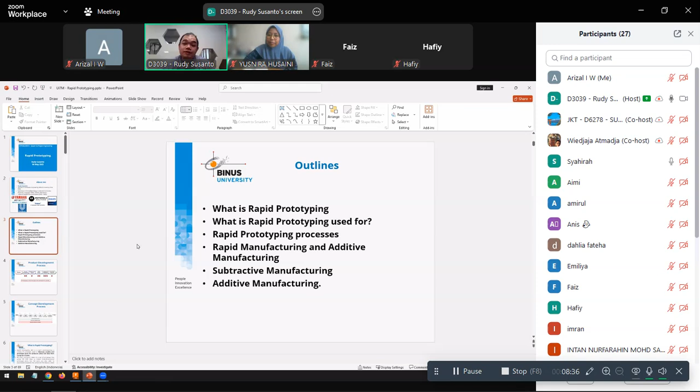In the product development process, you have planning, concept, system level design, detail design, testing, refinement, and production ramp-up. This is usually very common in the development cycle of a product.

Especially in planning, when you plan, you start to draw a concept of what you want to do, either in the electronics or the case or design that will be presented by the user. One note is sometimes you can also make more time for the product or the case. Usually in computer engineering or embedded systems, most of the time you are focused on the development of the electronics.

What I mean is if you have 100 hours, usually in university you are taught that this 100 hours is 60% design, 40% testing, or even sometimes 60% testing, 40% design of the electronic design. Now, the problem is when you are in industry, usually that 60 hours will be reduced to about 40 to 30 hours only. So the development of the embedded system, especially the electronics, you will be hard pressed to do in only about 30 hours, or 30% of the time.

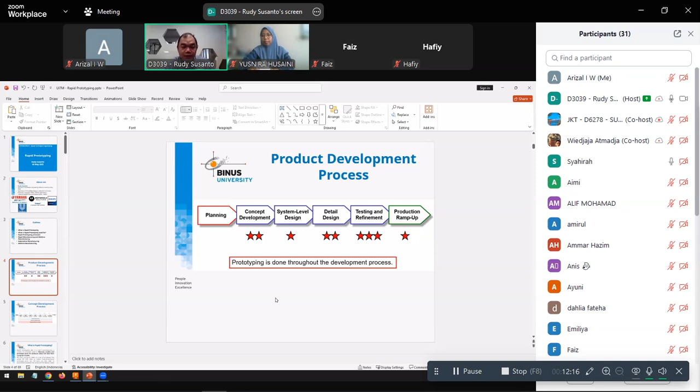In every part of the development process, like planning, concept, system level, detail design, testing and refinement, even in production ramp-up, you can include prototyping or rapid prototyping, either for small refinement or even major revision of the device.

So where does this prototyping come in? It's when you already try to build and test the model. That's when you want to start the prototyping of the product, especially the design, the material you want to use, what kind of strength, how long you want this product to last, how efficient the manufacturing is, etc. So the prototyping process is quite important, even at early stages of the product.

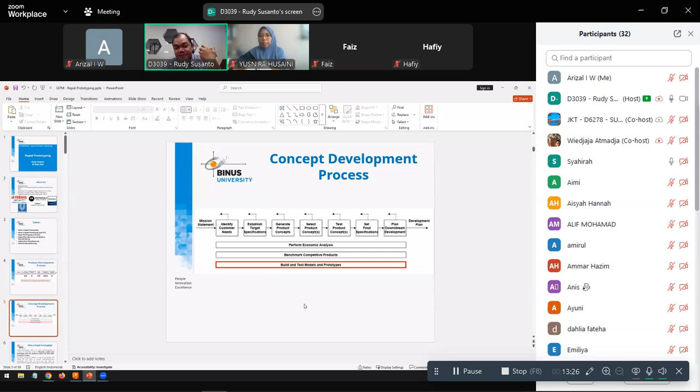Now the problem is, when I told you rapid prototyping, what is actually rapid prototyping? Rapid prototyping, or RP, is a term that encompasses a variety of processes used to fabricate models.

Prototyping a part for a product using CAD data from computer models, so you can already build your design if you want, even at the early stages of your design, your product. For example, it doesn't have to be complicated — just basic measurements: length, height, thickness.

You can start to do some prototyping, especially connecting it to the user. What type of user wants to use it? Is it normal people or disabled people?

For example, when we try to build a braille system, you have to consider if the product is quite heavy or light enough for the user to carry around, or is it too expensive? Do you need a battery that lasts longer, or how many hours will the user use it? That's the kind of thinking you want to incorporate at the earliest stage of the design.

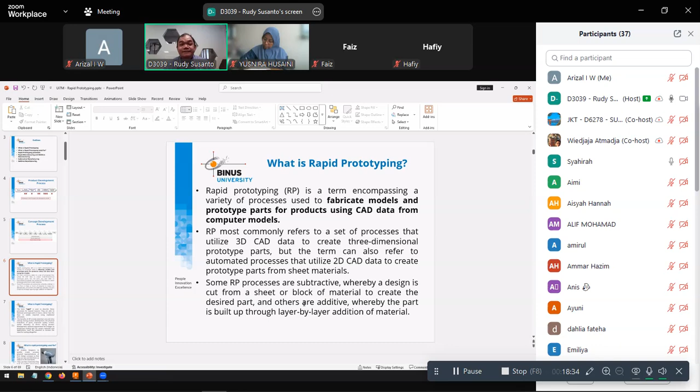That's enough. Now, the term 'rapid' describes a process for several reasons. The term rapid is usually confined to from days to hours. Maybe all of you already heard about 3D printing, CNC machine, and like that.

These are the tools that we will use in terms of rapid prototyping, so you don't have to worry about that. Usually if we talk about this about 10 years ago, you would find it quite difficult or challenging when you want to make a rapid prototype.

Usually we'd go to Singapore, not Singapore—when I want to use it, I go to my partner in Philippines, Thailand, or even China. But in this day and age, you can easily find 3D printing in the university or in a makerspace.

Now, this redefines the term rapid. Ten years ago when we called something rapid, it was one week. Now it's merely hours or even days. I want to start to print right now at 9 to 10, then in the afternoon after lunch, my model is already fixed. That's how the production system has evolved now.

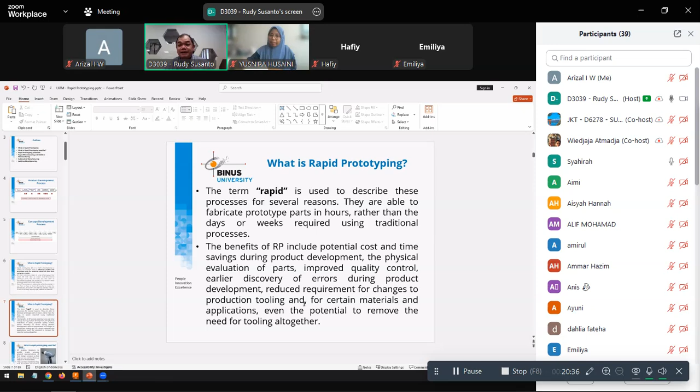But that also gives room for you to fix your mistake quickly. That's what I like from rapid prototyping. For example, this is one of the designs that we try to build.

A simple hand drill. This is all 3D printed. The casing is all 3D printed, the design. The motor and the controller we try to build it—you will in college learn about how to build that using microcontrollers. How about the battery? But everything in here is 3D printed.

The materials may be different, the colors may be different, but we built this, and the production for this is about 16 to 20 hours, that fast. So you can build it, you design it, and the day after tomorrow you can show it to your lecturer. This is our design—that's how fast rapid prototyping has become.

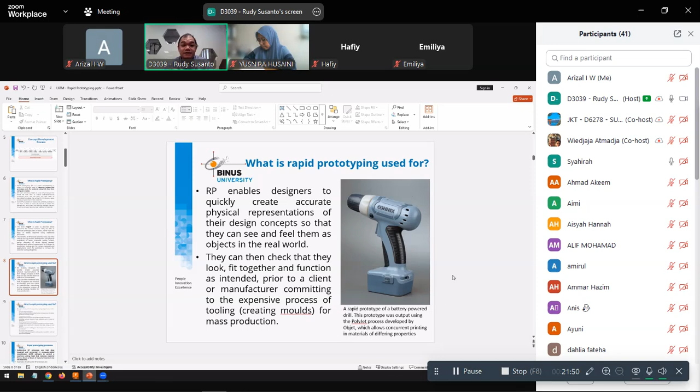Now, what is rapid prototyping used for usually? The first one is in-house design evaluation, physical testing, clarification. For presentation to marketing or market reaction, it's mainly because you want to try to sell your product as soon as possible.

But in our field, in computer engineering or electrical engineering, the main use is in-house design, physical testing, especially about the safety. As an engineer, one of the most important things you have to evaluate in your system—for myself—is 50% that the device is working. I'm sure all of you can attest to that. You're already taught how to test, how to build, but the main problem, the next 50%, is how safe your device is.

That is the main concern for me when you are trying to build a device that is, especially if you want to make it a mass product that many people will use.

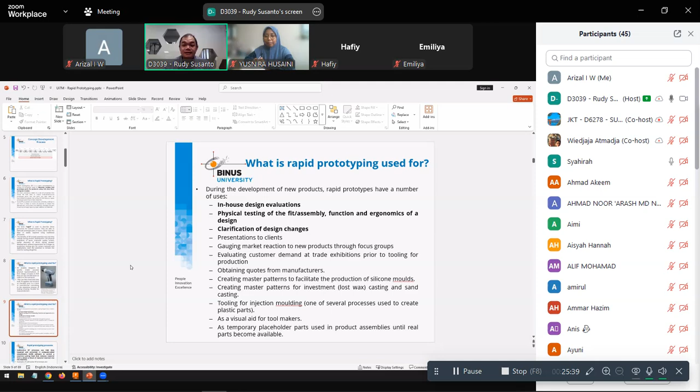Now, the rapid prototyping process can be built by, for me, two main processes. The first one is subtractive, the second one is additive. The subtractive usually uses CAD or CAM to control a sheet or block of material. You reduce the material into the shape or pattern that you want. That is subtractive manufacturing.

You can use laser cutting, water jet, plasma, milling, routing, hot wire, EDM or wire electrical discharge. The simplest one to use is hot wire cutting. You can also use milling and routing, especially with this era of CNC, routing and maybe hot wire cutting are starting to get more accessible to students in college.

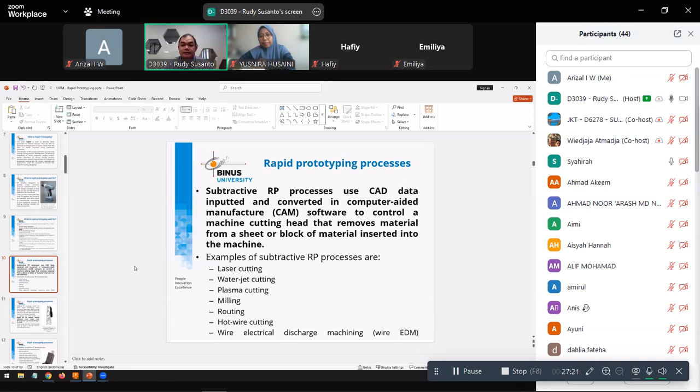But for plasma cutting and water jet cutting you maybe need some certification in operating the machine. For laser cutting, usually you don't need certification, but you need safety and training for using the machine.

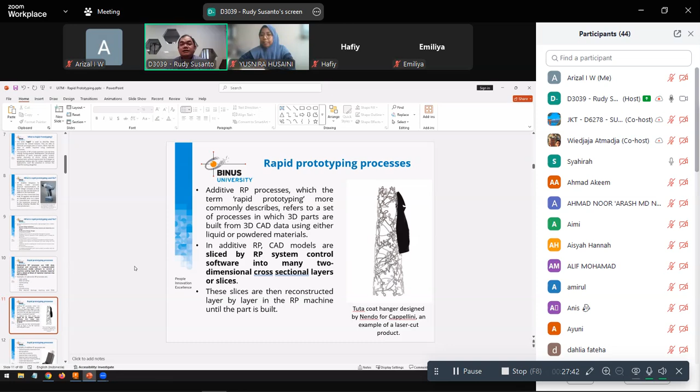Now, for example, this is a hanger designed by Nendo for Cappellini, an example of what's used for rapid prototyping. For example, this one is for laser cut. You can also use, for example, this one - an inhaler design that I was involved in at Kimia Farma. We tried to produce how the inhaler is designed, how the product would be used by the patients who try to use them.

This one is additive - if you look closely there's a line like this. This is one of the products that uses additive manufacturing. You can use, for example, SLA, jet system, DLP, SLS, SMS, DMLS, even 3-dimensional printing or fused deposition modelling, using metal or something like that. But this one we use FDM.

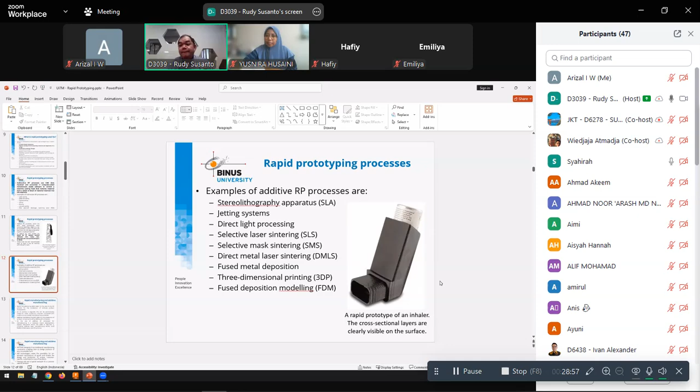The advantage of, for example, additive manufacturing is that sometimes you do not need any specialized tooling. But the machine is a tool, sir - yes, but additional tooling, the machine itself is the thing that you will use. But usually what I'm amazed with in the additive manufacturing world is that you need very minimal tooling to process something from your design.

So you can usually move from a CAD or 3D design to the machine itself rather quickly. Usually if we use, for example, a 3D printer, the only tool you need is just a cutting plier, that's all. Some sanding will be needed, but it's not that difficult to use. So the tooling is quite minimal.

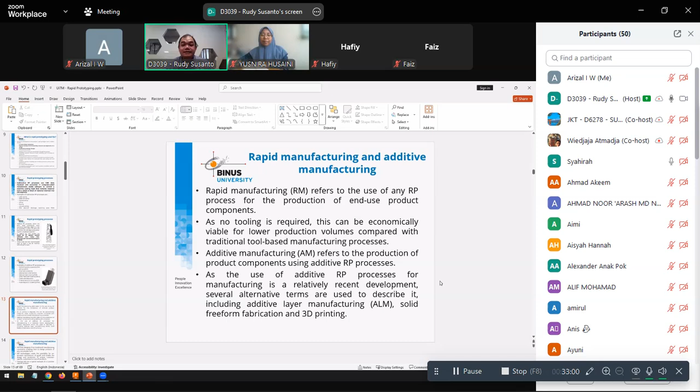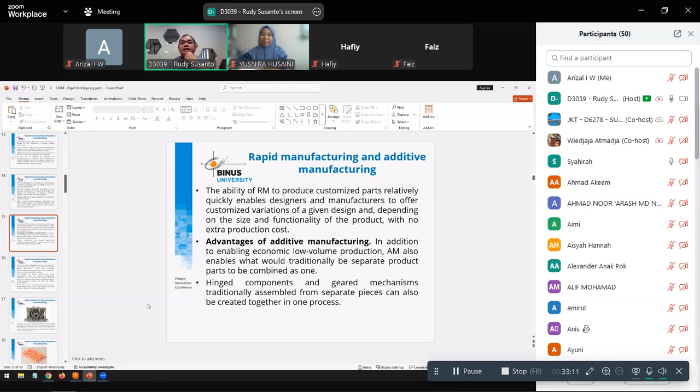Now, the advantages of additive manufacturing is usually you can enable a low economic, low volume production. This is why I highly recommend it for you as a designer, especially if you want to make a design for just 10 pieces, 5 pieces, or even one. Additive manufacturing is one of the best tools you can use.

For example, for your project, every group can have a very distinct project. You don't have to build something with a very large volume. If you're in mass production, you have to go to a factory in Malaysia, Thailand, Vietnam, even China—that's the big boss, we say. But if you just want to build one or two, either for your final project, group project, or personal use, additive manufacturing is one of the best things you can use to design your project.

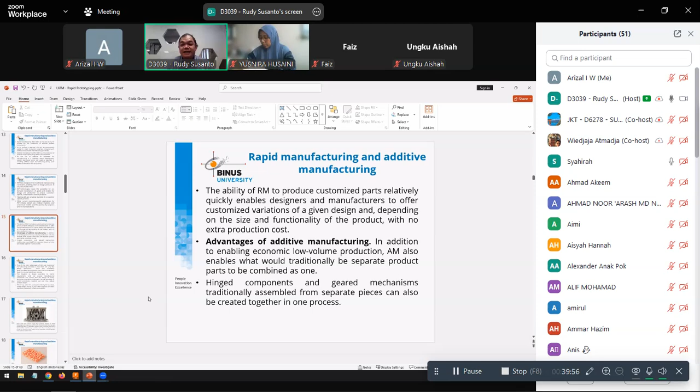One of the main advantages of AM for me is the absence of molding. AM usually does not need molding or casting. You can use it as a source for molding and casting, but usually AM doesn't need that.

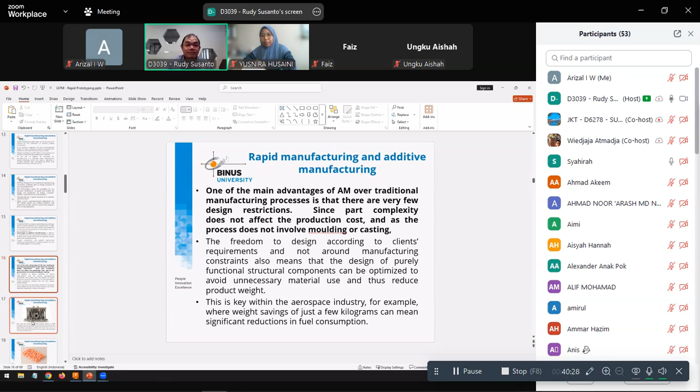For example, you can build a very complex engine block using additive manufacturing. You cannot do this with subtractive manufacturing because this kind of complex geometry cannot be achieved with subtractive methods.

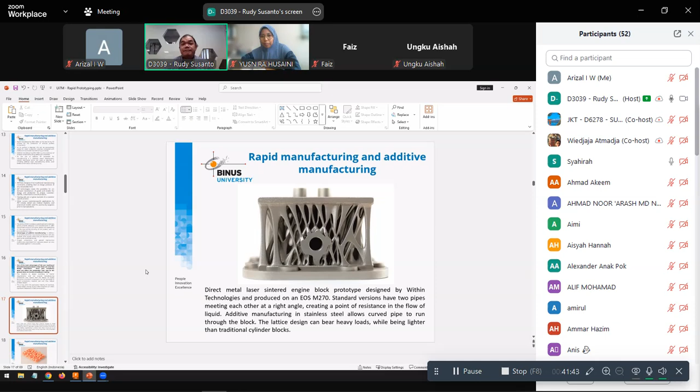Another example is a hearing aid. Every person's ear is very distinct, so you use resin casting, SLA, to produce these for about 10 to 20 people at once, while still retaining the uniqueness of each ear. This is the power of AM, and for me, it's just incredible.

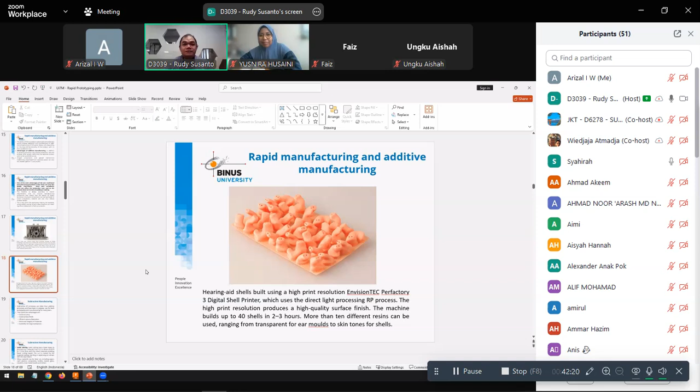Now let's talk about something else. This doesn't mean that subtractive manufacturing is bad.

There is also the benefit of subtractive manufacturing. For example, things like phone cases use subtractive manufacturing for the master molding. The first advantage is that subtractive manufacturing has good accuracy.

You build it once for the molding, and after it's agreed upon, you can produce thousands of identical products with better accuracy and good surface finish. For example, with a phone case, the shinier you build it, the better the surface finish of the material.

Sometimes with additive manufacturing, you can only get about 90 to 95% of the product with a good finish. That's common, not unusual. So for about 1,000 pieces or so, additive manufacturing only achieves about 90 to 95% good finish.

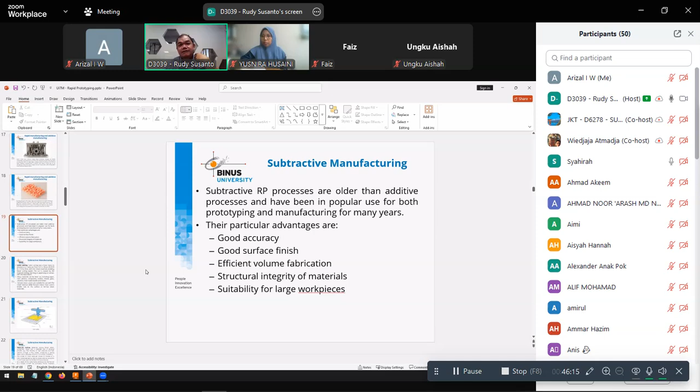Now, what technology is usually used for subtractive manufacturing in the factory? The first one is laser cutting.

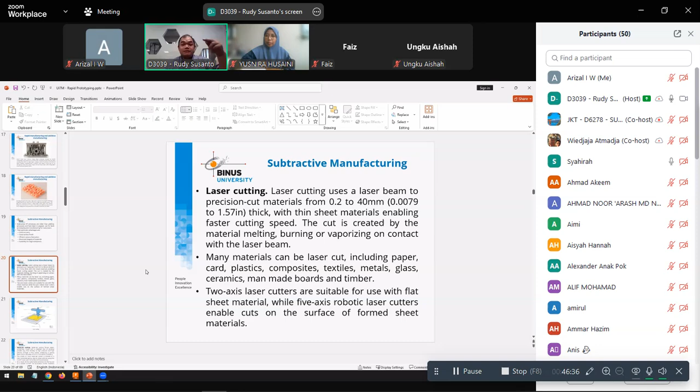I won't be too specific, but usually laser cutting involves focusing a laser beam and using it to cut material. Depending on the material, you can use gallium, but usually the most common type we use is CO2 laser.

Laser cutting has some advantages and disadvantages. First, you can cut plastic, especially acrylic, up to 30 to 40 millimeters thick, which is quite thick. But sadly, laser cutting usually doesn't have a good surface finish if you want specific contours—that's its weakness. But the advantage is that you can make very small, precise cuts.

Now the danger: first, the smoke. If you have or operate this device, please wear eye protection. Lasers usually focus and burn the material, so you need good air, and please wear safety goggles if you want to try it. The laser particles reflect and will hit your eyes.

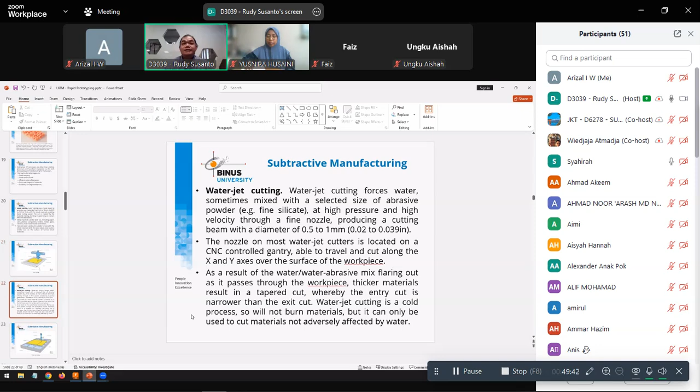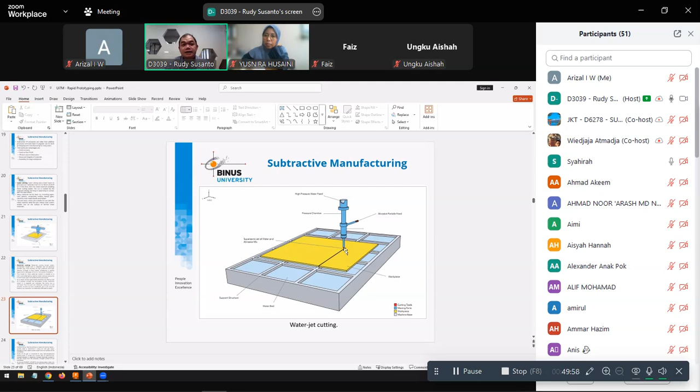The second one is water cutting. So if you need to cut very thick material, water jet is different from a laser. A laser you focus using a lens; water jet uses ruby or emerald to focus the cutting. Inside, this is not only water but high pressure water, more than 60,000 psi.

This is mixed with an abrasive particle, like the sand you have in sanding paper - that is the abrasive particle. So this is mixed at about 60,000 psi, and it will cut about 50 to 100 millimeters of steel like butter.

Now the danger is when you operate this: if you put it in a static position, it will try to cut until the support structure is also cut. So be careful about this. But this is very good if you want to deal with metal.

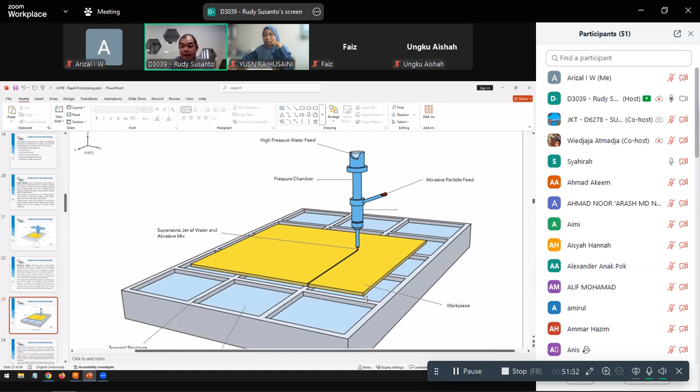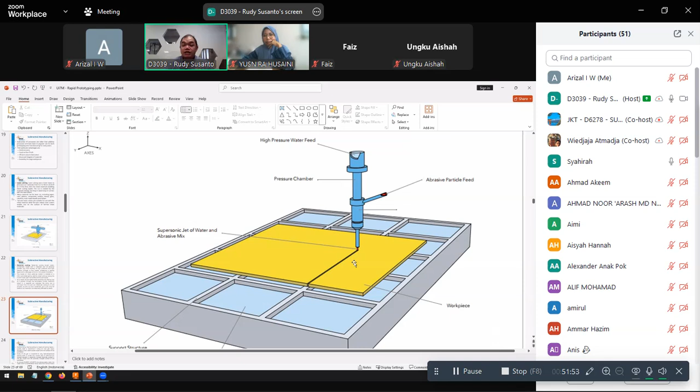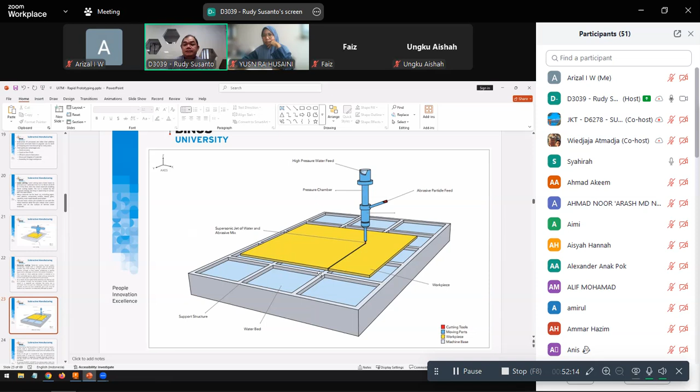Metal, some large workpiece - the advantage of this is the cutting also cleans the metal, the steel, from rust. So this is usually used if you want to build something more rigid. You'll usually find this water cutting, not laser, in a car factory, especially when they build something like a container. Or usually in fencing, if you want to build a big fence, or a very large cooling system, this one is good.

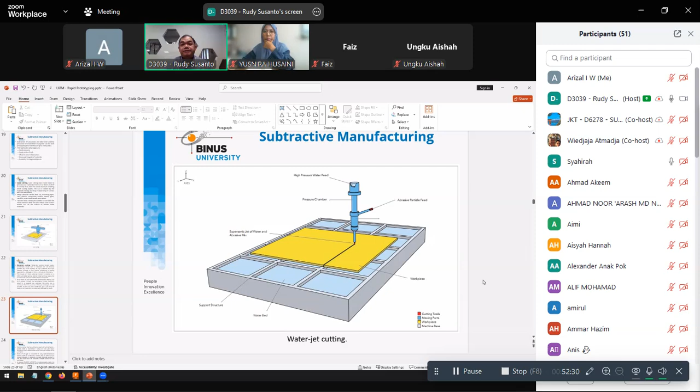Okay, the next one is plasma. Now plasma, you usually use for cutting non-ferrous material, stainless steel, something a bit hard to weld (what is the English word for 'ngelas'... joining metal, in Bahasa Indonesia 'las'). I forgot. Usually I use plasma cutting if you want to use something like stainless steel.

Aluminum is also good for this. But usually the plasma cutting, you can use this kind of subtractive material manufacturing for non-ferrous material, or something that's hard to be joined by electric welding - something that is hard to specialize for welding, plasma cutting is very good for that. So if your product is usually stainless steel, brass, copper, or something welded for specific purposes, CNC plasma cutting is better.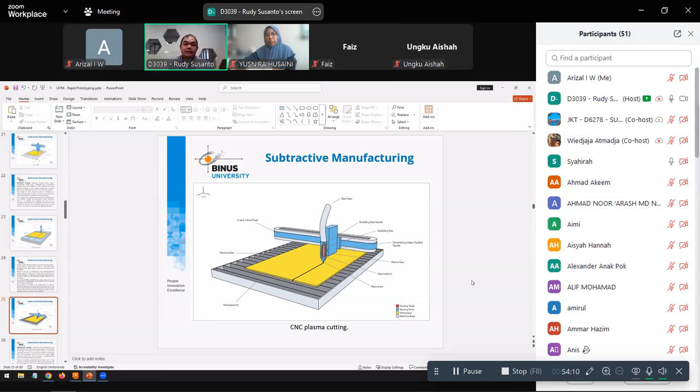Now, milling and routing - this is usually what you try to use for generic material, usually aluminum, or if you have something that is not 2D, you want to make a contour or something like that. This is the basic. Also, if you want to train as a mechanical engineer combined with electrical engineer, this is the tool that you have to master. Usually, in every technology, these are the two tools that I use most.

Either manual or CNC, but usually I prefer manual. You can tune it more beautifully once you master the right way to design the contour easily. This will give you very large value as an engineer - this is bang for your buck.

This is most valuable if you want to train as a mechanical engineer, but also if you're in electrical engineering or computer engineering, embedded engineer, and you want to have a skill in production, I really recommend you train this. It doesn't have to be a CNC. You can usually come to the university if they have a mechanical engineering laboratory, see how the procedure works, and it will give you a good picture of how your system will be built.

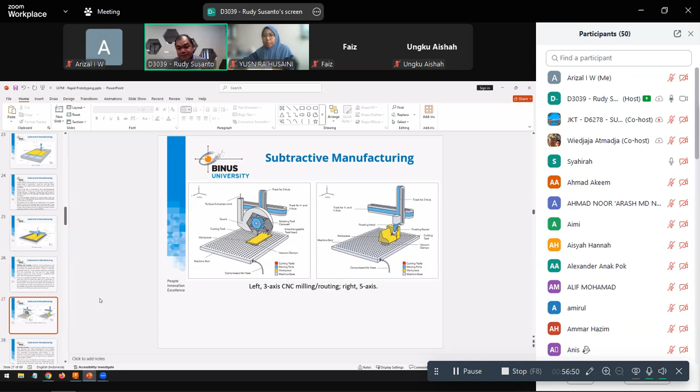This is one of my first machines, not CNC, but milling and routing is one of the basics you can use, as an extra or additional skill if you want to build your own case or something like that. This is usually found on campus, in high school or university.

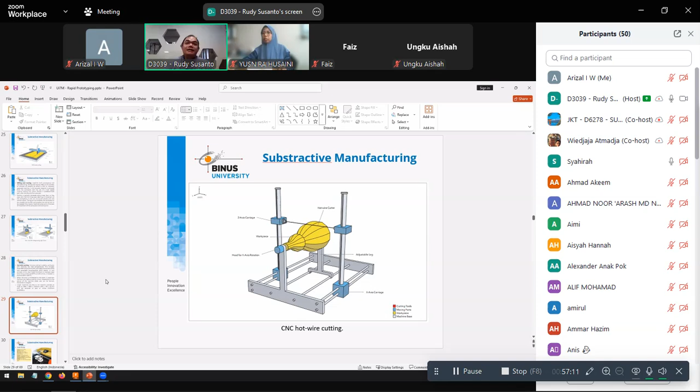One of the most common things I see is hot wire cutting. This uses polystyrene or something like that. You can make a model of your product using polystyrene, cardboard, or something similar. This machine is usually used for experimenting with form factor, how your device should look, how big, how easy it is to carry. Hot wire cutting is good for very early experimentation, to see if something is possible.

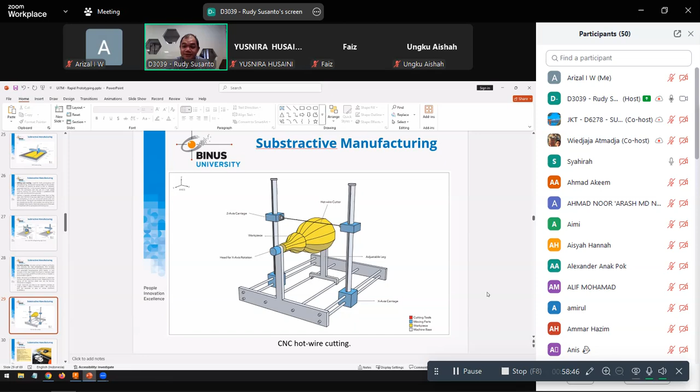If I want to use subtractive manufacturing to build my device, should I use something more specialized? Hot wire cutting is good for determining or evaluating your design. It's not too expensive, not too poisonous, but you have to be careful with the hot wire. Also, if you're conscious about waste, hot wire cutting is one of the most non-recyclable wastes you can produce, so use it wisely.

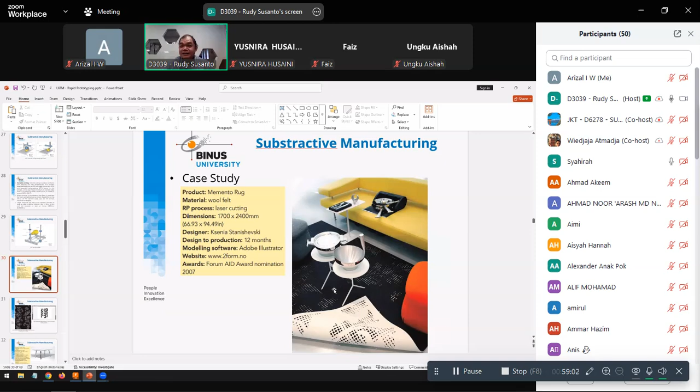This one is an example, from subtractive manufacturing. This example is a rug, like this. They use a laser to cut it.

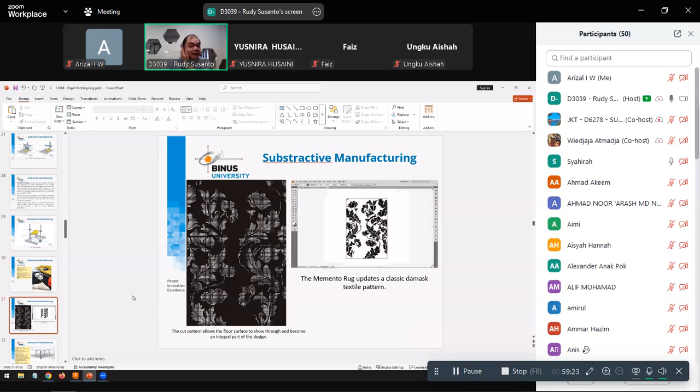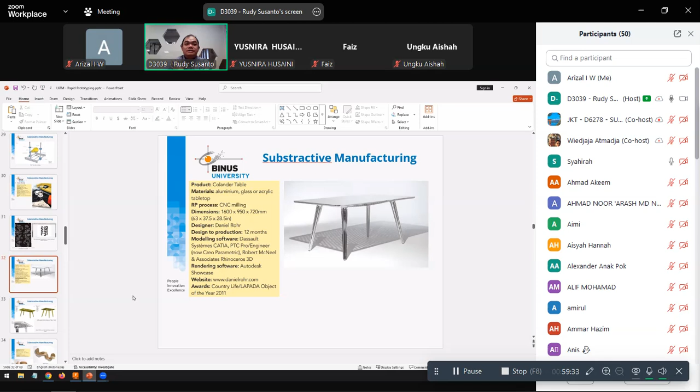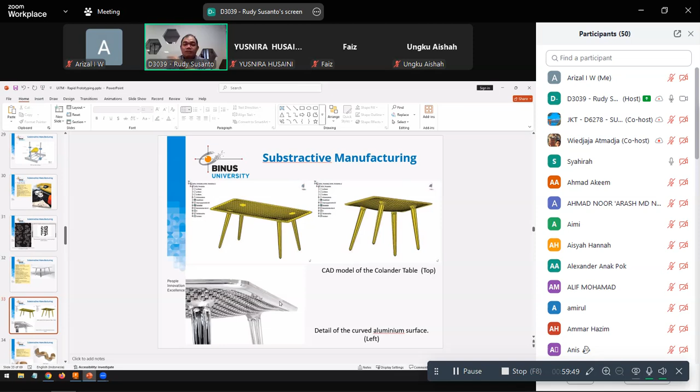This is the software and technology that we use. This one is a table. The upper part is like this, they put holes in it, resulting in a curved aluminum surface like that.

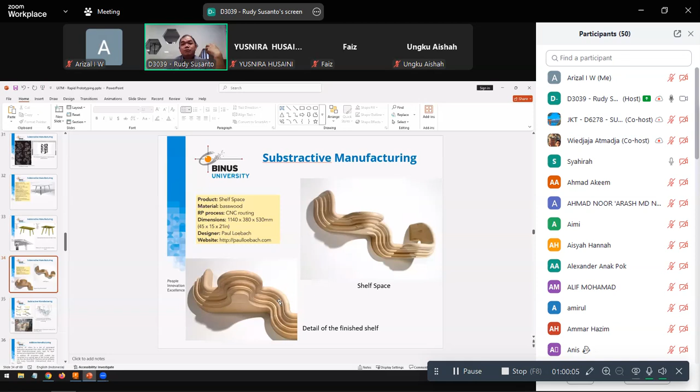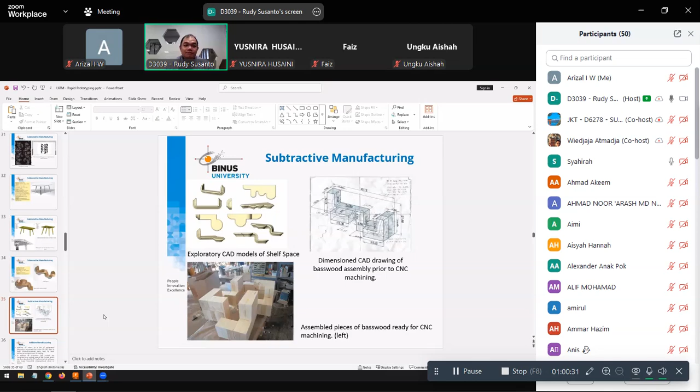You can also use CNC routing, for example, to make a wooden Shelf Space. How does it build? The process is like this: the CAD drawing, they use CAD models, and after that they assemble it. This is one of the more beautiful methods, if you want to make a combination of art and engineering, product design or something like that, you can use it.

The second one is additive manufacturing. What is additive manufacturing? It refers to a set of technologies where, sometimes using CAD data, you build your project or case layer by layer. There are many technologies you can use, but the concept is simple: you build your device or product layer by layer. What differentiates every additive manufacturing technology is only the technology used to build the device.

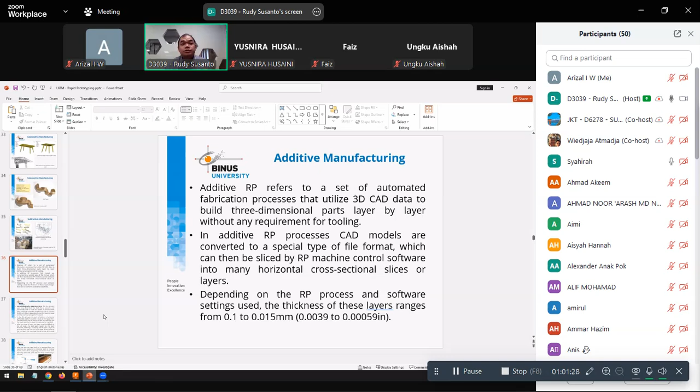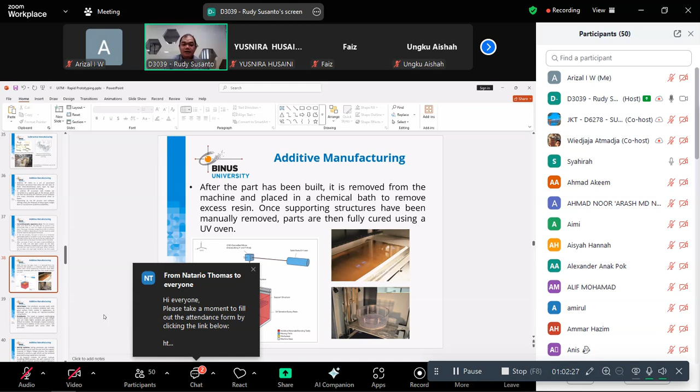The first one is SLA. Contrary to what most people think, FDM is actually the last technology to be developed, not the first. Contrary to popular belief that FDM, fused deposition modeling, came first and then SLA came after - no. In industrial design and manufacturing, a lot of additive manufacturing technologies have been around since the 1980s, 1990s, even some since the 1970s. But FDM is the most recent one. So contrary to popular belief in the YouTube area or makerspace community that SLA or MSLA is the recent one - no, it is FDM that is the recent one.

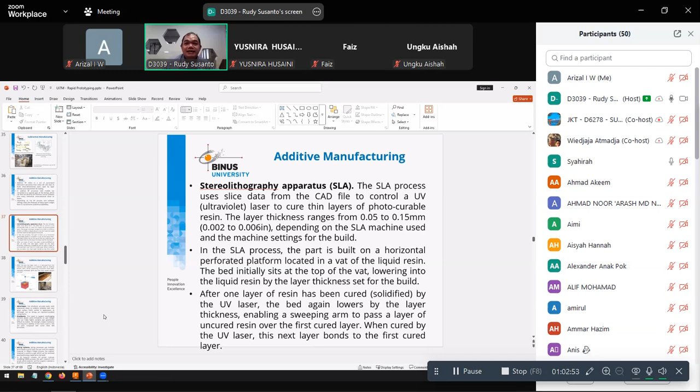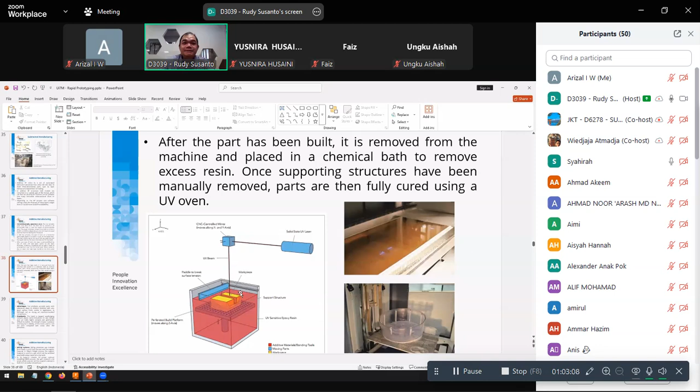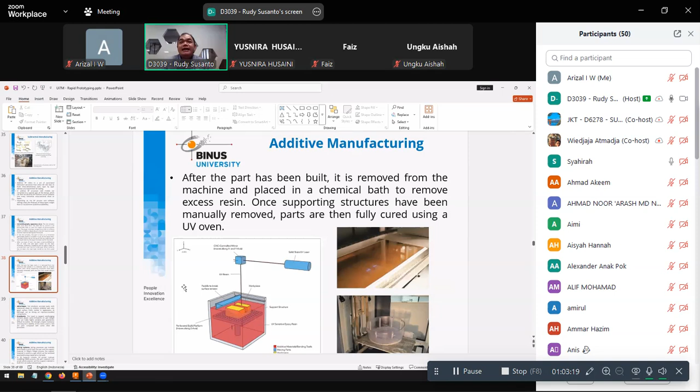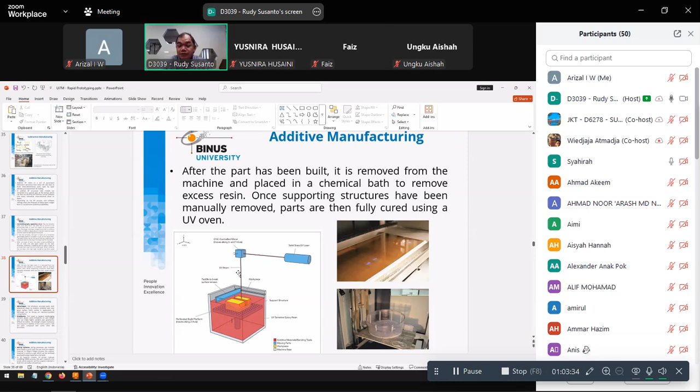The first one is stereolithography, SLA. You put this in - it uses a UV laser with a CNC controlled mirror. You build it by directing the laser, layer by layer. Usually SLA, MSLA, or resin printing, the popular pronunciation is when we use resin, you can use curable resin, so the laser, usually UV, will harden it. After that, the troublesome part for resin printing is after you laser it and it's hardened, you need post-processing, using either IPA, and after that you have to cure it more. After curing, then the device or product you want to build is done.

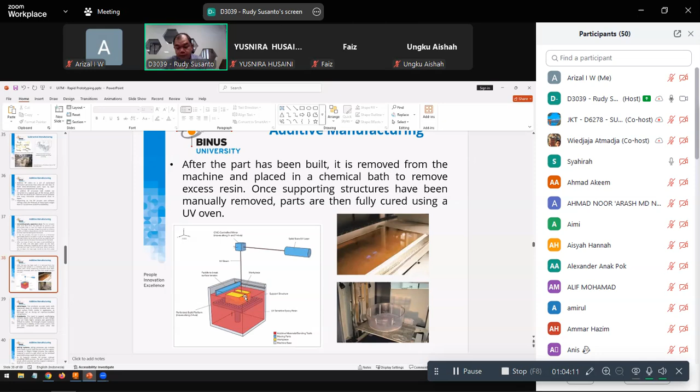Now, the second one is jetting system. Jetting system is more like printing. It is introduced by HP, Hewlett Packard. The jet is the same technology used by your printer, paper printer. The difference is it's like printing on the same paper over and over again, building its layer. The difference with regular jet and 3D printing jet is you print a thousand pages over and over again, building it layer by layer by layer.

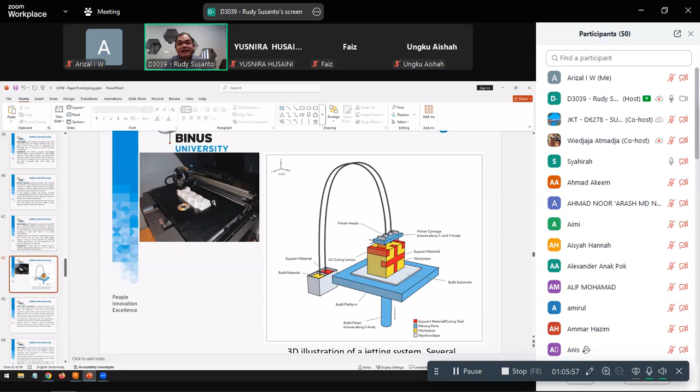This is printer carriage, this is printer head. At the side of the printer there is a UV LED that after printing will cure the ink, the pigment. The difference is if you print a thousand papers, this is more like papers, but the jet system you print it layer by layer by layer. It's almost the same as printing a thousand pages of paper over and over again. The difference is the resin used is more like gel ink. If you've used gel ink for your pen, it is more thick, but you use it layer by layer.

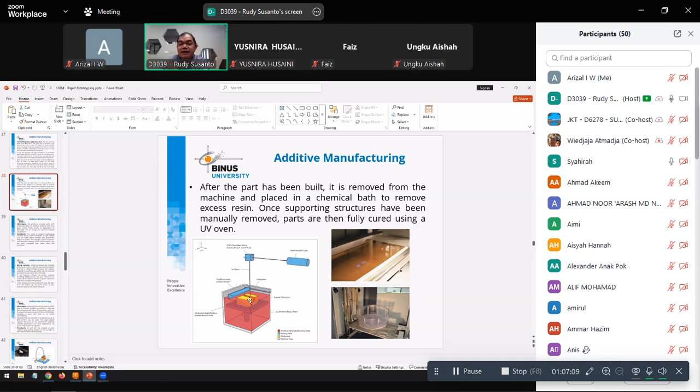This one is DLP, one of the early manufacturing methods, introduced by Texas Instruments. The difference with MSLA or SLA is that the laser comes and you control a mirror. The mirror will excite and draw the layer that you want to build. But DLP uses an LCD projector beneath it. This is the one most commonly used in commercial 3D printers.

For example, Anycubic Photon, Neptune, Creality Halot, or for example Prusa. This one is direct light processing, DLP. This is in early stages. They use a projector. The build platform is from the top. It will be cured layer by layer.

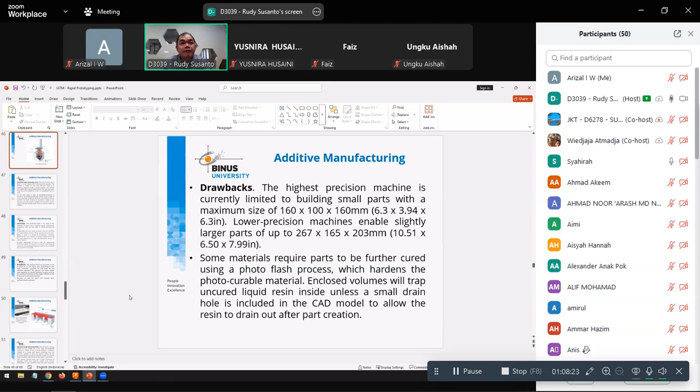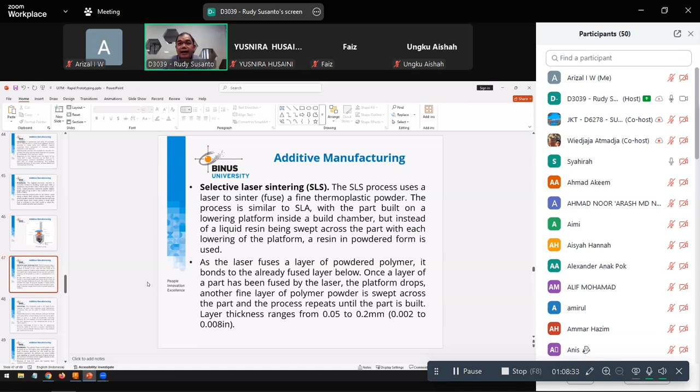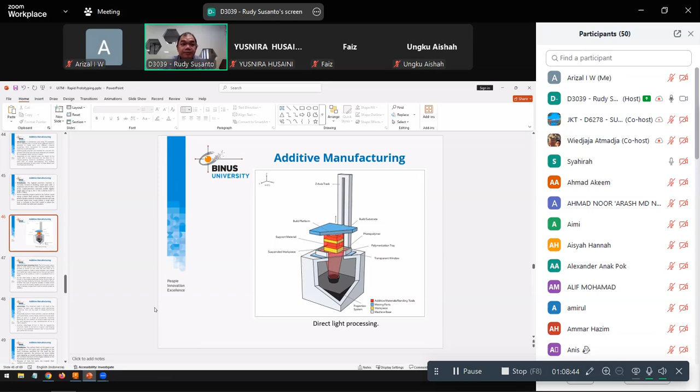Now this is SLS, selective laser sintering. These three technologies, SLA, jetting, and DLP, use a liquid resin. They use a liquid resin to be hardened and cured by UV. Now SLS uses a different material, usually powder, either nylon or some can use metal, but the machine is very expensive. Usually if you want to build material like nylon, PA6, PA12, or some polycarbonate PC material, SLS is one of the best technologies you can use to build a 3D printed AM material for that. I think NASA uses this for machining some of their components.

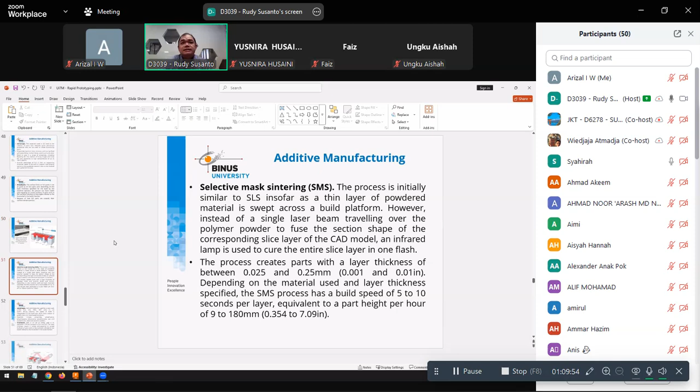SLS. Now this is the same, selective mask, it is the same. For the SLS, this is directly from laser. The powder is put down, and after that you laser it, then laser it again, one layer at a time, like that. This is more like the other type, SMS, selective mask sintering. They call it that - they try to imitate the things used for EUV, for making silicon.

Now what's the difference between SMS, selective mask sintering, and this one? The SMS doesn't use laser. It uses infrared light, mirrors it and reflects it. So the difference between SLS and SMS is only the light source they use. The first one uses laser, this one uses infrared light. Now the strength is far superior with this one. Contrary to what people believe, this one is better. No - when I use it in the field, the laser one is better, but this one is more precise.

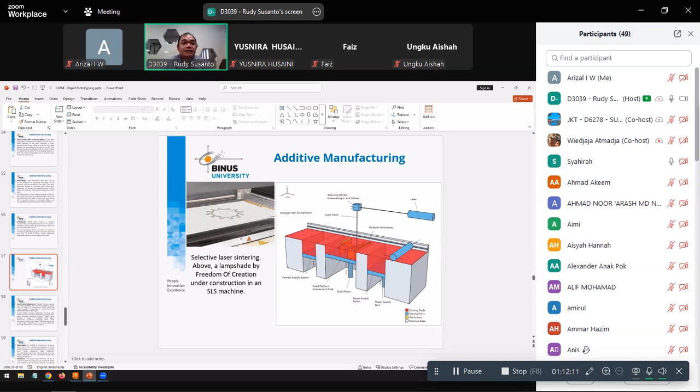This is DMLS, for metal. If you want to build something like aluminum, simple aluminum, the grade is 1XX or 2XX, you can, but please remember this is not easy.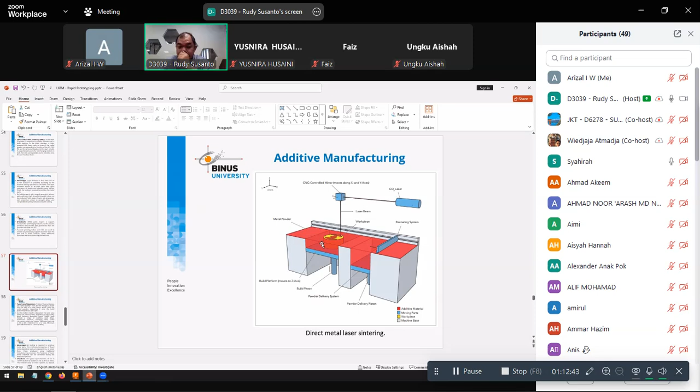DMLS, direct metal laser sintering, is not usable if you want to try to build a firearm. You still need tempering treatment, metal heating, etc. This is only to reduce your casting time.

So if you build a piston or engine control, ECU or something like that, and you use direct metal laser sintering, please remember you need post-processing. This is only for reducing your metal casting time. It's not as dangerous as liquid metal forging, but it is brittle, very brittle.

So if you think, my uni has this, then I can make something for my car — no, you still need metal treatment, metal heating, etc. Especially for a firearm, it is very dangerous to build one using this. It will explode on you. Please be careful about this.

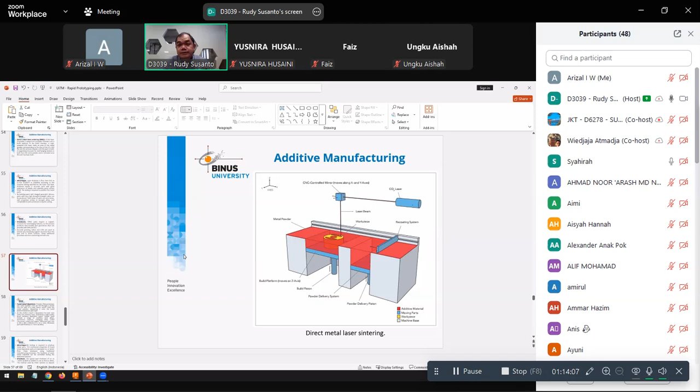Last but not least, the most popular one, FDM. I think in your campus or Makerspace you also have this kind of material, using filament and heating and so on. This one is quite good if you need a very rapid prototype.

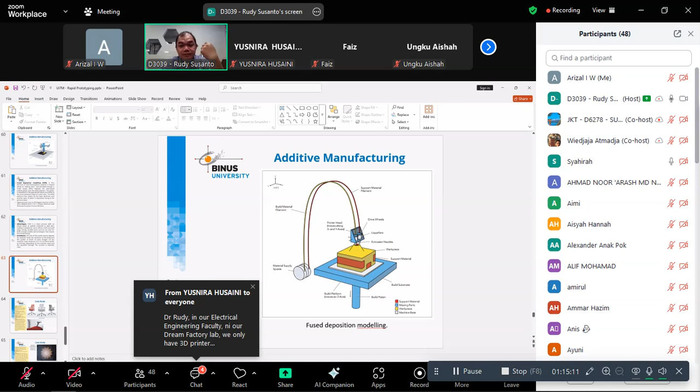This is one of my go-to machines. I can build a very simple prototype in hours. After I finish designing in 15 minutes, I start up my printer, 2 hours later, after I go to lunch, the product is already there, and I can use it for measuring or testing or something like that.

This is the case study, a mixing of some additive manufacturing techniques — using polyurethane, stainless steel, aluminum, glass reinforced plastic, self-skinning polyurethane, foam, and nylon. This uses quite a few technologies for additive manufacturing.